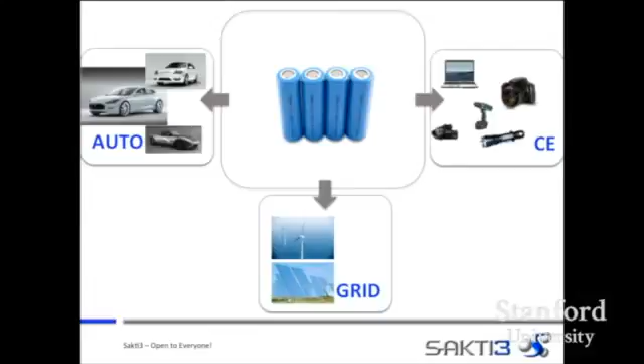And the reason is that batteries enable really important things. It's a simple statement, but it embodies a lot. Batteries are important in 3 different sectors, and interestingly, the same humble technology, the same 18650 cell. How many of you have seen a battery cell like this? It's 18 millimeters in diameter, 65 millimeters long, and it is in 3 different industries: consumer electronics, automotive, and grid storage. As such, it addresses billions of dollars in value. Most importantly, it affects our lives in ways both simple and profound.

In consumer electronics, the market sizes are enormous. Within a few years, we expect to see markets in excess of $4 billion, principally in smartphones and laptop computers today. I'll talk a little bit about what the next markets are going to be in a moment.

In automotive technologies, we project over $3 billion, and that really depends on when the launching point for electric vehicles will be. How many electric vehicle fans in the audience? I see charging stations. So I say not if, but when, and I know the people who raised their hands agree with me on that.

The reason is not just because generically we want to see clean technologies come onto the drivetrain, but from a life cycle analysis standpoint, an economic analysis standpoint, and a sustainability standpoint, we really think this is a very good solution to powering personal transportation.

An improbable thing happened in that gas prices went up enough to make it actually pencil to buy a hybrid electric vehicle. How many drive a hybrid? You're actually doing a good thing for your family finances by doing that. 10, 15 years ago, it was maybe a break-even proposition. Now that's not the case anymore. As we've seen market penetration of hybrid vehicles, we think there's a very strong economic case for electric vehicles if we can get the energy density up and the battery cost down.

In grids, most of the world has substandard electrification. Most of the important parts of the world, most of the economies that are going to come online and join the first world economies. It's interesting how we accomplished electrification in this country was with large public works projects, principally TVA and all that followed. In China, Three Gorges Dam was an example of that, very similar to how we accomplished our own electrification. What's likely to happen next are smart grids.

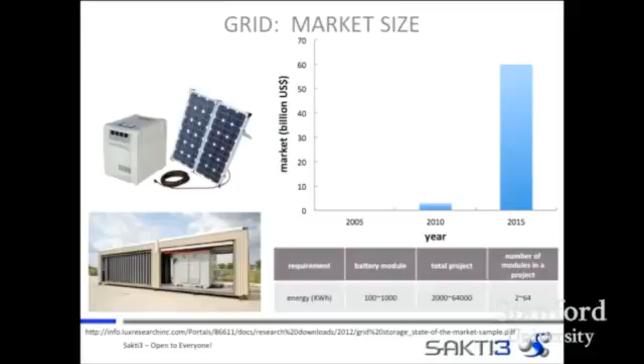So batteries don't actually enable everything we'd like to see just yet, and the principal reason is they cost too much. So certainly energy and power density are important, but the cost is presently a little too high to have everything that we'd like to see.

Over time, you're walking around your house or your office with a recharge cord hanging off your battery cell. The reason for that is complex. There are multiple reasons for failures inside batteries that limit their lifetime and performance, but it translates into something consumers can readily see.

By sector, there are different challenges. In consumer electronics, today's markets are obviously laptop computers and smartphones. Next are wearables, clearly. How many are wearing a wearable device right now? Those are the engineers, right? Wearables are likely to become a very important pathway to connection to the internet.

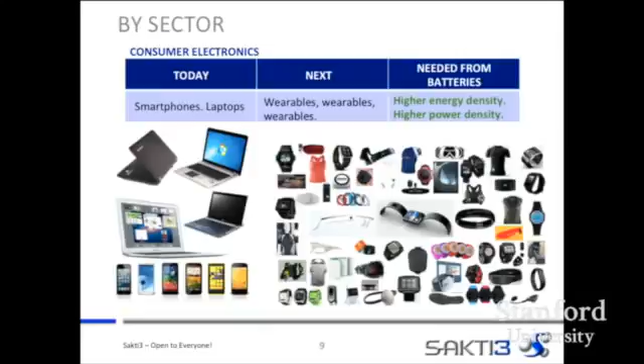Battery technology is not sufficient right now to enable the small devices that people really want. Wearables are a little bit larger, a little bit less energy dense, and a little bit expensive. So what's needed is higher energy density and higher power density. It's not the expense in this case, because the willingness to pay for a very high energy density technology—a wearable device you don't have to charge but every couple of days versus twice a day—is actually really high. People are willing to pay for that, especially given that the wearable device itself can be rather expensive. But energy density and power density are very important in that sector.

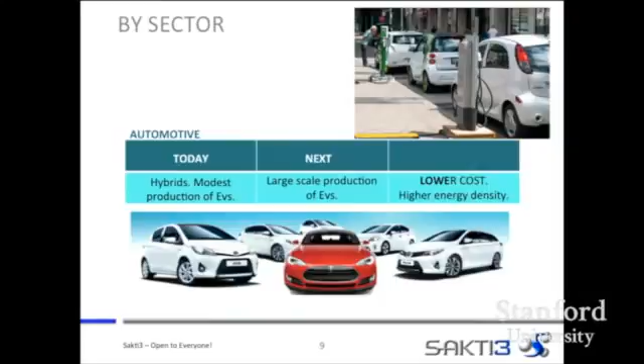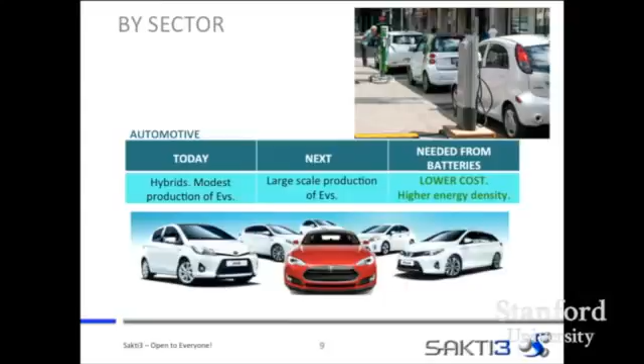In automotive, by contrast, today's markets are really hybrid vehicles and some production of EVs, but small run productions in general. The next markets, we believe, will be large-scale EVs—lower-cost EVs, so that everybody can have an electric vehicle. And what's needed there is not only high energy density for range—that's obvious, everybody would like more range, more electrons in their electronic gas tank—but most importantly is cost. A battery pack today can cost upwards of $15,000 to $30,000, comprising a huge cost to the vehicle and making it relatively unlikely that we'll see market penetration for economy vehicles.

In grid, today there are demonstration projects and microgrids in several municipalities around the United States and other countries, with some combinations—permutations of renewables, power electronics, electric machines, energy storage, and various generation technologies. So a genset plus electric storage plus renewables is a common scheme for that kind of system.

Tomorrow, the next markets are smarter grids that are larger, that can power homes, communities, and municipalities at a larger scale. Again, what's needed there is higher energy density and lower cost. When we look ahead, the grid battery cell is very similar to the auto battery cell—it's a larger capacity system, with more stringent operating requirements and more stringent safety requirements.

So by sector, if you summarize these things pretty simply and quickly, you come to the conclusion that if you have a higher energy density, a higher power density, and a lower cost, you not only enable new products, but you create larger markets. All right, so that's pretty well understood.

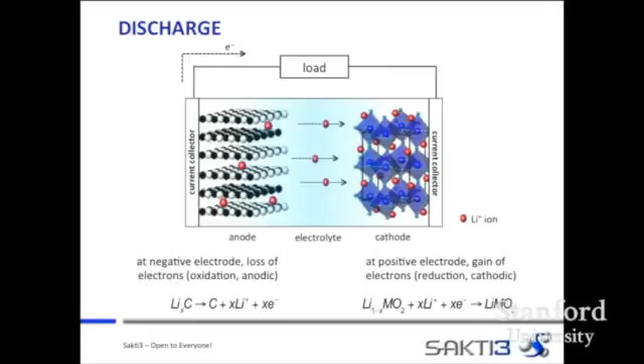For those who may not recall how a battery operates, here are a couple of slides to orient everyone. This is on discharge. At the negative electrode, there's a loss of electrons. The kinetic equations are written down. The anode and cathode are separated by a separator. In traditional batteries made by lamination technologies, a liquid electrolyte is used to allow transport of lithium ions from the anode to the cathode on discharge, and from the cathode to the anode on charge.

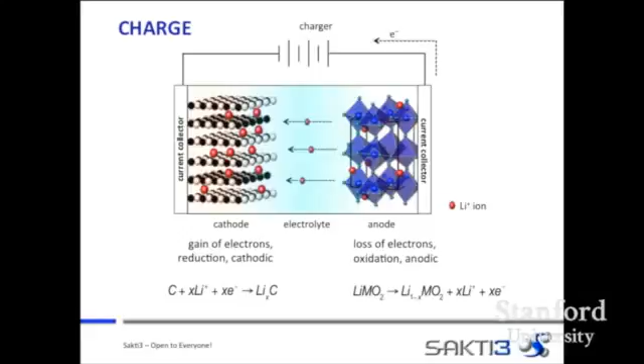Now, that's the toolkit, and that's pretty common globally. Those electrode materials, the cobalt oxide, nickel, cobalt, manganese, NCA, iron phosphate, vanadium, silicon, these electrochemistries, to a smaller extent silicon, titanates, are globally scaled already. And in general, they're all made the same way.

In a production process that uses porous materials, trained in a manufacturing line where the particles are mixed first in a wet slurry, deposited onto a conveyor belt, and rolled through a slot die or doctor blade to a certain thickness, rolled, compressed to shape. A separator is placed over the top, then the anode, which is generally carbon with lithium, and then that whole cell is vacuum filled with non-aqueous liquid electrolyte. In general, there are 18 or more unit operations in the production path.

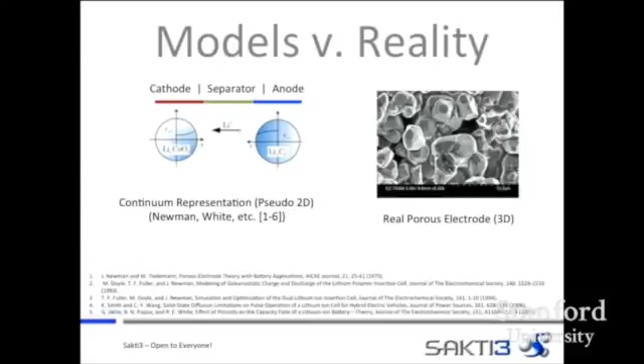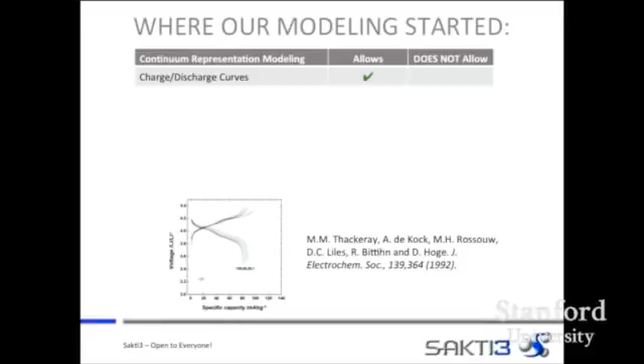The reality, of course, was a little different, as we've seen. A real porous material is very complex - it has multiple materials, even coated materials. The shapes of the materials are quite different; they're polydispersed, and not all particles even have the same shape, let alone the same size. When we started to work on this problem, it was clear that existing models allowed prediction of charge and discharge curves and allowed selection of high voltage electrochemistries or high theoretical capacity cathode chemistries that would give large total battery capacities. They didn't allow direct incorporation of the microstructure effect.

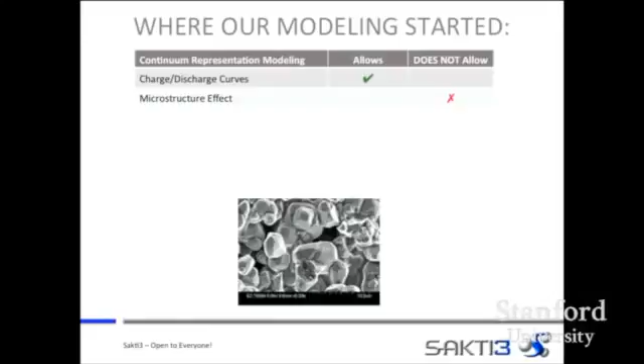Any porous media people in the audience? Bruggeman's correction, right? Handy for volume fraction, but it breaks down at very high and very low volume fractions. More importantly, it doesn't allow you to interrogate concentrations of stress, heat, electrons or charge, and chemical species. So even though you can account for changes in continuum behavior through corrections like Bruggeman's, it didn't allow us to interrogate how we select particles - should they be polydispersed for high packing fractions, or monodispersed? What should be the interparticle spacing? Some of these things you can control by selecting materials, and we really wanted to be able to do that.

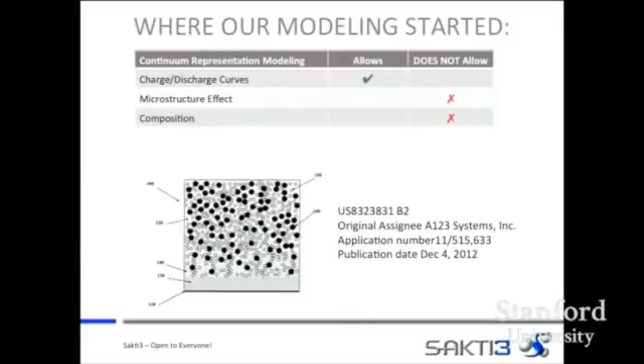A continuum model also doesn't allow direct interrogation of composition. When you assume one electrode or the other is a smooth, homogeneous continuum, it doesn't let you do the inverse problem - what should be the fractionation of species, how much PVDF, how much carbon can I tolerate, how much surface area to volume ratio? It also doesn't allow you to look directly at failure.

And so there are a lot of pictures like this in the battery literature. Who are our battery people here? I can say whatever I want now, right? Raise your hand higher - who are all the battery people?

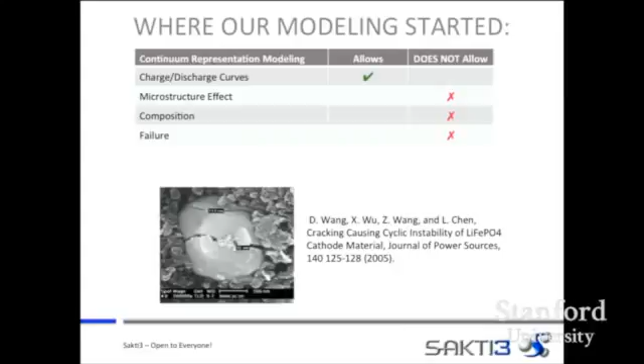Okay, admission, guilty admission. Yes, I know batteries have been the Afghanistan of the business world, but you see a lot of pictures like this, a lot of pictures of things that are putative failure mechanisms.

We had a question: where is this failure coming from? Because the manufacturing process actually incorporates large-scale deformations in these particle networks by compaction of the material under large rollers. So one of the questions we had was, are they breaking before or after you start charging the batteries? It looked pretty clear to us it was probably some combination of effects.

It didn't allow you to optimize microstructure. And this is something we were very interested in doing because there were a lot of possible solutions. So there's no point in modeling something and trying to wish it into existence.

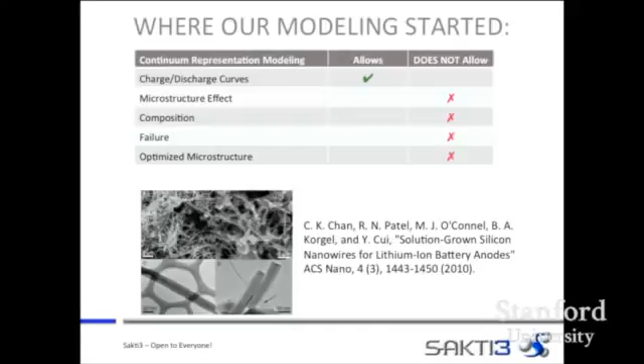There were a lot of groups proposing microstructures, everything from foams, like was done in nickel metal hydride batteries, which were the forerunner to lithium-ion batteries—that was the last generation electrochemistry—all the way up to HIPCO-produced nanowires and nanotubes and other kinds of microstructures.

So what we really wanted to be able to do was write down a set of models where we were solving partial differential equations on the surfaces of those particles, so we could decide what kind of particle microstructure to build. And then, of course, we wanted to be able to understand the manufacturing process effect.

To the earlier point, you induce some damage in manufacturing, and we wanted to be able to assess that, and certainly to be able to understand the difference between what we were doing to the materials in manufacturing versus what was happening to them due to intercalation stress.

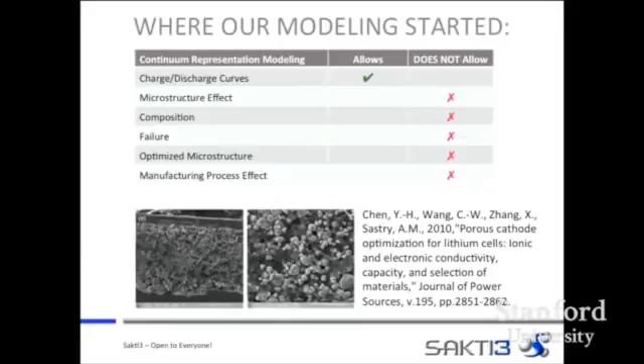Intercalation is when lithium nestles into the cathode and expands. Those can be coincident with very large volume changes, thus very large strains, thus phase changes in the material.

So if you put a large temperature change or a large stress change on the material, you've got a different material, you've got a different phase. And that in turn affects the intercalative properties of the material.

So it was important to us to understand where those stresses were coming from, whether they were intercalation induced, whether they were manufacturing induced, and also to understand the failure.

So we started to write some papers on mathematics, on percolation statistics, which is sort of a long-time love of mine, and critical phenomena—understanding the mathematics of the brink, the mathematics of the tipping point, the point at which you have at least one single domain spanning path of material that you can walk continuously from one boundary to another on. That really is the onset of the real change in transport properties.

So if I have a material that's non-conductive and I add some certain fraction of another material, at some point, at some volume fraction, I start to be able to conduct, right? That point is a percolation point, at which the conductive phase becomes connected.

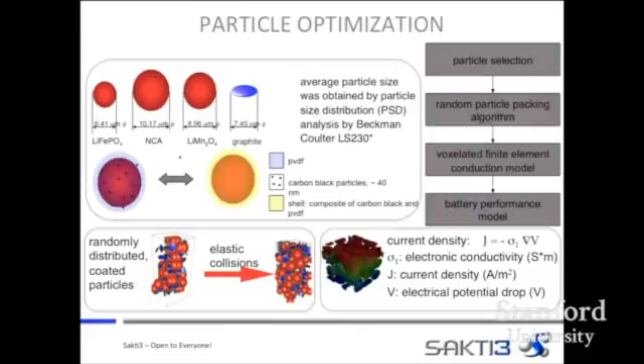So the whole reason people put carbon into battery cells in the cathode is to form those single domain spanning paths, in order to get conduction of the electrons. Because when you make a battery cell out of an oxide as the cathode, it's not very conductive. And for the battery cell to work, you need to be able to get electrons out.

So you need to add conductive additive to the point where, for a certain thickness of cathode, I can actually conduct and get the electrons out and drive a load—which is the first picture I showed on discharge.

So we were looking at all of these different materials, and there were some closed form solutions for certain kinds of arrays, monodispersed spheres and monodispersed rods and so forth. We wanted to look at everything at once, because the shapes and sizes of what was going into the battery cells were quite diverse.

So we first started to write papers about what happens in monodispersed systems where you have triaxial ellipsoids, very prolate systems, oblate systems—what are the critical phenomena? Then we started to look at polydispersed systems, and then we started to write algorithms, which are called settling algorithms.

So we could put spaces in 3-space, points in 3-space, assign particles to those spaces, apply gravity to the whole system, and then start off with something that you could do computation on. Because you can't do computation on something where the particles actually overlap. And so we came up with methods of writing algorithms to build the geometries that we do calculations on.

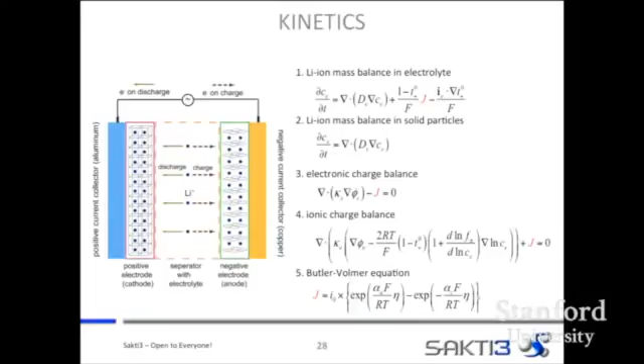Then we started to take a look at the kinetics. And the classic kinetic approach in battery cells is really the Butler-Volmer kinetics, which is a semi-empirical reduced analysis that enables you to write down the constitutive law, if you will, for a battery cell. And so we followed that same sort of pathway that had been laid out by Professors Newman and White and others, except that we wrote down the kinetic equations for the geometries of interest.

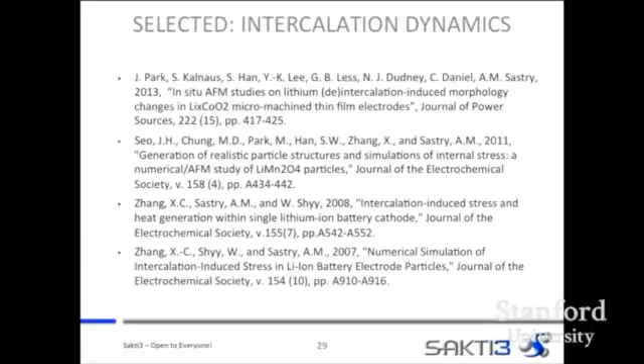And so we began to solve these PDEs on these multiply connected complex spaces. And we wrote several papers on intercalation dynamics for various electrochemistries, towards understanding what the relationship was with stress. And how we did that was we wrote down the mechanics equations, which I'll show in a second, with a dilatational term which represented intercalation dynamics. And so that was kind of a neat way of incorporating two pieces of the multiphysics into the same numerical framework.

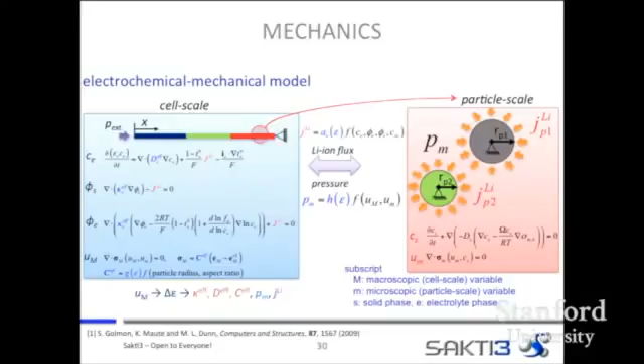Batteries swell, and what happens is during cycling of a battery cell, they irreversibly form lower density compounds, and they swell. Normally we ascribe those things to reactions of the electrolyte with the cathode, and that's pretty much what they are. But the bottom line is that swelling in a canister of a battery cell causes a pressure on the face. In a cylindrical cell, it causes multiaxial stress. In a prismatic cell, it causes a face pressure.

So we wanted to look at that too, because that ends up being really important in electric vehicles. It ends up being important because you have to figure out what the size of the casing is going to be for the battery cells. And so understanding what face pressure had to be in order to keep conductivity high was important. So we incorporated that into the analysis.

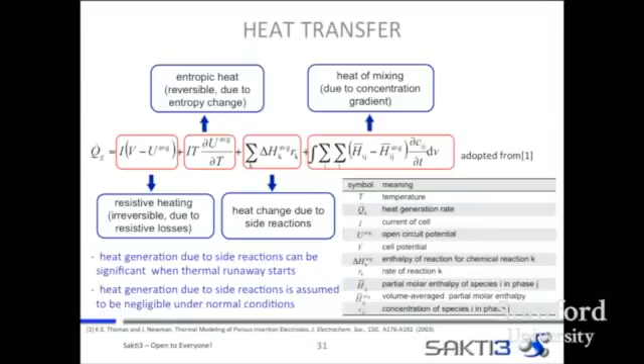We also worked out a representation for heat transfer, which allowed us to simultaneously look at resistive heating and entropic losses. And that was important because, again, for phase change, we wanted to know whether we were still cycling the same compound that we had started with. And so we developed a framework around that.

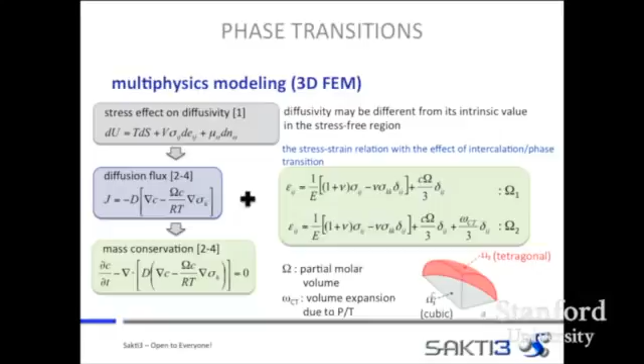And then finally, phase transitions in this part of the talk. So we looked at the stress effect on diffusivity, the flux, we applied mass conservation, and we were able to solve the PDEs on the surface of all these different particles for multiply complex regions. And we wrote a bunch of papers about that.

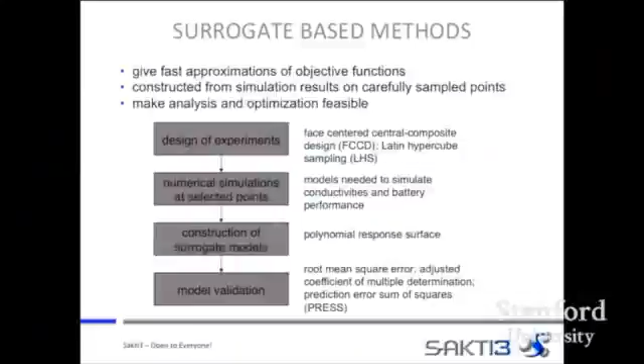Finally, in optimization, we use surrogate-based methods. That's just a robust way of arriving at minimum energy solutions when you write out, generally speaking, a set of partial differential equations which describe physical phenomena, and you're looking for local minima. Then you're trying to either minimize cost or maximize energy density or maximize power density or apply some weighting function to certain objectives. So what we wanted to do was systematically compare battery performance based on changing what went into the batteries. It was important for us to develop that framework.

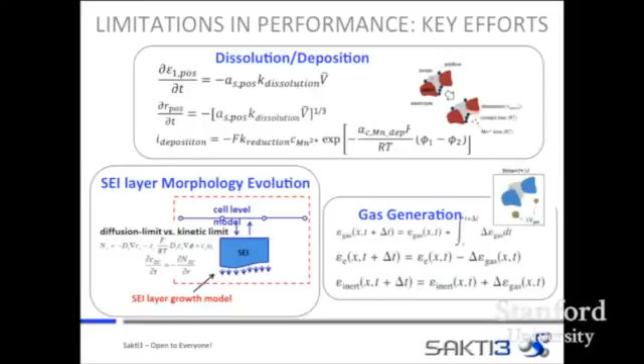And of course, we wrote a number of papers about that as well, including degradation mechanisms. So to summarize the key efforts we looked at over around 20 years or so of work on the subject: dissolution and deposition, looking at dissolving the cathode and its effect on battery cell performance, SEI layer morphology evolution, and gas generation being the principal root causes that we thought of as important in degrading battery cells.

Then we thought, this is great, okay? So now we've got a framework, and we can systematically look at the trade-offs between some important parameters, and I'll show you a couple of those. One is ionic versus electronic conductivity.

For ionic conductivity, you want the lithium in the cathode, or lithium in the anode, to race to the cathode, and then you want it to race right back. You want to recover 100% of it. You want as reversible a reaction as you can, and therefore you want the ionic conductivity to be very high. Liquid electrolytes make sense on that basis because they tend to have a really high ionic conductivity, in general higher than what is solid.

On the other hand, you also want the electronic conductivity to be high, and so you want the electronic conductivity in the cathode to be high. That suggests you use a high degree of conductive additive, and maybe you have a lower porosity, which gives you less room for your multiply connected electrolyte. So these two things tend to be at odds in a real battery cell.

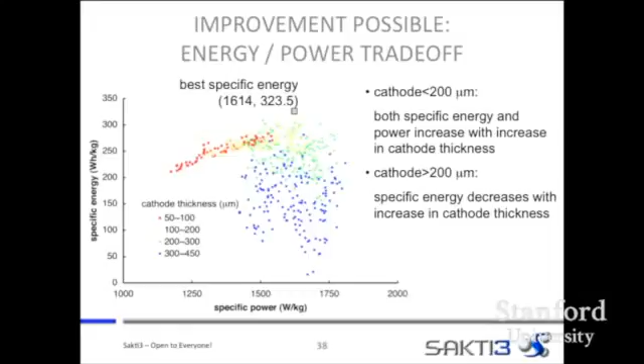We also looked at energy and power. So for a high power system, students in the room, what do you think you'd want? A very thin electrode or a very thick electrode? Why? There's resistance in going through the electrode. Precisely. You don't want to deal with all that resistance, right? You want to get the electrons and the ions out fast. And so thin makes a lot of sense. It's all surface area, right? Everything's sitting right there on the surface, very accessible, right?

For energy, you want the reverse. You want a really high capacity, and you want to reduce parasitic masses. So you don't want to pay for things like a large amount of electrolyte or a huge separator in your system. You don't want to pay for any parasitic masses. You want a nice, big, thick electrode. Again, you're at odds, right? And so looking at the trade-off between energy and power was very important. Typically in commercial cells, you'll see cells advertised as either high power or high energy, but generally not both.

For that very reason, because the thicker electrodes tend to be the energy cells, the thinner ones tend to be the power cells. We looked at specific energy against specific power, and again, for cathode thicknesses, identified where you would find commercial sweet spots, where you would find combinations of specific power, specific energy, and cathode thicknesses. It sort of made sense.

And then finally, one other example, improvement possible in reducing mechanical failure. So presuming that mechanical failure was, by classical fracture analysis, an initiation phenomena where you would have a small penny-shaped crack of infinitesimal size that at a certain strain becomes a growing crack, right? So it's classic fracture analysis. The idea was to figure out how small of a particle you can have such that your strain never gets big enough to grow a crack. It's not that you'll never have cracks, it's just that it won't reach the critical size.

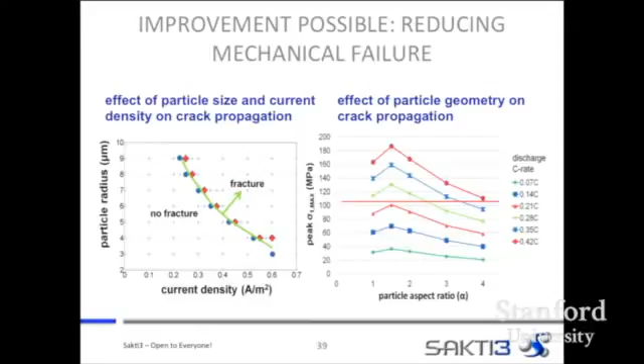And so we identified some ranges, and it turned out that there was a small enough particle where you were unlikely to get propagation of failure.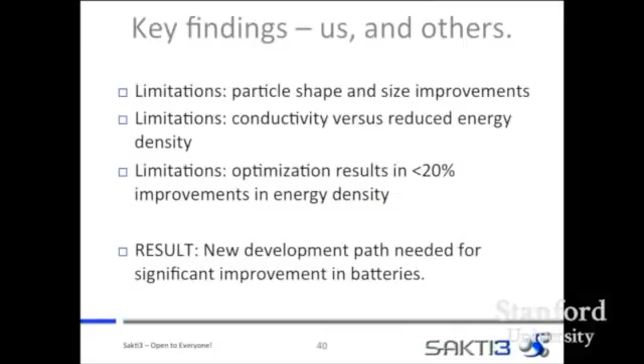We had begun this journey hoping to really look at how much things could be improved, with the thinking being: with the 5-volt materials coming online, with very high energy density cathode particles, can we reduce some of the conductive additives and really see a generational change? We really weren't seeing that. So the result was that we felt we needed a new development path for significant improvement in battery cells. Now into what we think of as the interesting part: the best way to build a battery if you could do it at low cost.

So you have a number of choices: 1D, 2D, and 3D. Generically, we can think of a 1D material like a plate, and you could distribute the active material like a 1D object. 2D would be like a rod, and 3D would be sort of a sphere. In the limit where you have all of the active material in 1D, it's really a thin film, because that's a 1D phenomenon—you're moving right in the Z direction in the film. So you can think of 1D, 2D, and 3D in that way.

You can do a thought experiment with geometries defined then. The thought experiment is like this: suppose I distribute the active material as a sphere, a rod, or a plate—a thin film, 1D, Z direction only. Can I calculate the diffusive properties and the packing fractions that tell me which is the fastest horse to ride? What's the path to really deliver on? Because as you saw in this picture...

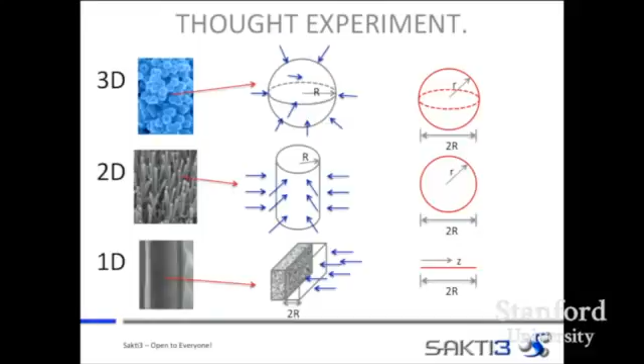And so with all these choices, we wanted a framework. This is actually a paper that we're just finalizing now, with Dr. Park, Professor Liu, and I. So here are the diffusion equations and boundary conditions, and they're pretty standard. You have a flux at the outside of the object and nothing at the inside—no flux at the inside. You look at diffusion as it moves through the object, as a sphere, as a rod, or in a plate in the Z direction.

You can quite readily and directly calculate the volumetric capacity. Assuming some diffusion coefficient, you can quite readily calculate what happens to a sphere in a box, a cylinder in a box, and a cube filled with space-filling material. And then you can quite readily calculate what the diffusion-limited capacity is.

Now, it's a little bit obvious that for really small particles, in the limit as your particle dimension goes to epsilon, or epsilon goes to 0 even, they all look the same—doesn't matter if they're rods or spheres or thin films, it's all the same. As the particles get bigger, as the thin films get thicker, the differences start to emerge. The other thing to look at is that as the C rate, the rate of charge and discharge, increases, there are also differences. The thin films don't look as good, because you can't get across them—they're too thick.

If you increase the diffusivity in this example, in this little thought experiment, by 10x, the differences start to disappear. So if you develop on the path where you have improved diffusivity, all of a sudden the differences between these nanoarchitectured materials and the thin films are not as significant.

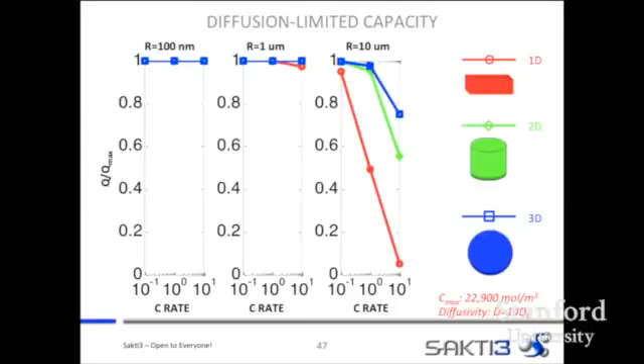But there's a wrinkle. It's not just diffusivity that matters, it's also packing fraction, because you can't have a space-filling system of rods, and you can't have a space-filling system of monodispersed spheres—you're limited in how many you can pack in. So when you factor that in, the analysis reverses, the result reverses. Actually, the highest capacity system is the thin film for the low and mid-range thickness, and the sphere is actually the worst in those two cases. If you then develop along the line of making a more diffusive system, your thin film almost always wins.

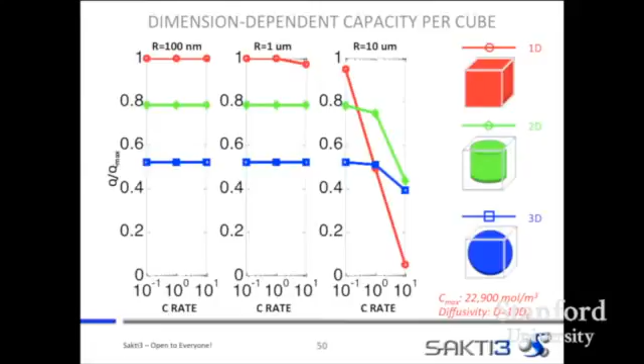So when we asked the scientific question of what path should you develop on, we said solid state, and work on the diffusivity. The other thing to note about this calculation is that these numbers are for lithium manganese oxide, which is a very typical cathode material used globally today.

The C rates are: C over 10 is normal for consumer electronics, C rate is very fast for consumer electronics and sort of normal for cars, and 10C is about the highest you'd ever really ask a battery to do. Most of that high C rate can be accomplished with S-P configurations rather than simply discharging a single battery cell at a very high rate.

So this is really a very practical set of projections, and this is why we are working on solid-state batteries.

Thin film today really had its genesis at Oak Ridge National Labs with John Bates and Nancy Dudney, who's been a collaborator of ours. At Oak Ridge, starting in about 1991, there were a number of different cathode electrochemistries explored.

There are a few companies doing this now. Most are making very small batteries, and most of the incumbents are also working on the cobalt oxide system. It's challenging to do this cheaply.

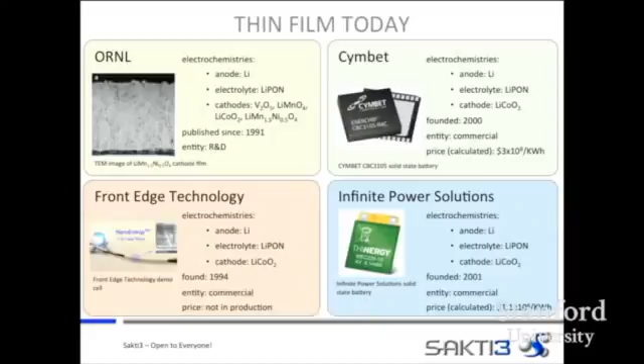So the other thing we decided to work on when we started a company was doing it on a low-cost manufacturing platform. Interestingly, when we calculate and project the price, it's millions and millions of dollars per kilowatt hour. So here was the riddle.

The cost, though, is a big deal, because the cost of the cell alone for a high-end system is $500 per kilowatt hour. When you put all of the system costs over that, it's actually quite expensive.

The R&D solid-state demonstration projects were producing battery cells with very high energy density and very high cycle life, but very expensive. So what we wanted to do was use modeling to optimize cells and pick a low-cost manufacturing route. To have real impact, we need to make them cheaply.

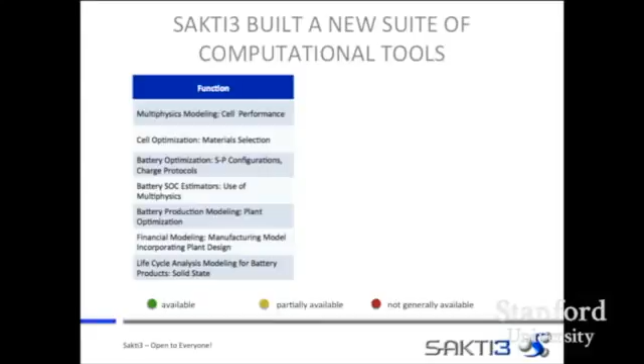So Sakti3 built a new suite of computational tools, which span multi-physics, cell optimization, battery optimization, state of charge estimators, production modeling, financial modeling, and finally life cycle analysis, which is the last thing I'll talk about.

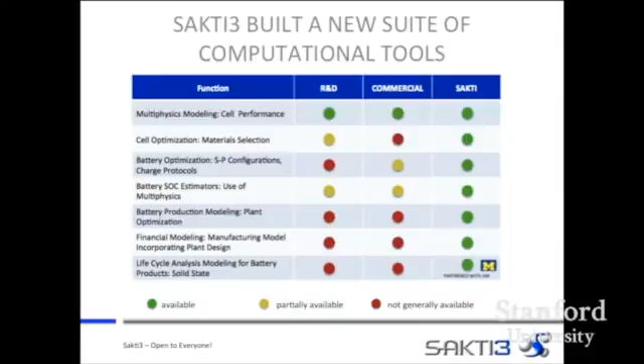R&D codes had some elements of all of these, and commercial codes had some elements of all of these. What we did was put them together so the handoff at each step—harder than it sometimes sounds—ensures everybody's using the same notation, handing off the same variables, and doing enough tests every time you make a change in one piece of code so an error doesn't propagate. It's actually very challenging to incorporate all these areas of science and mathematics, but that's what we set out to do, because we knew when we got to that bottom box, we wanted these products to make sense.

So we built design codes: cell performance, cell optimization, state of charge estimation, battery optimization, plant optimization, battery cost forecasting, and life cycle analysis. And these are what we projected.

We looked at about a dozen different electrochemistries before settling on the first one we decided to work on, and we projected pretty big improvements in energy density, which was our number one thing to work on.

We also did a lot of optimization of component thicknesses before we ever started manufacturing anything. Before we ever started prototyping, we ran the codes to figure out how thick and thin things needed to be, how fast we needed to produce them, et cetera.

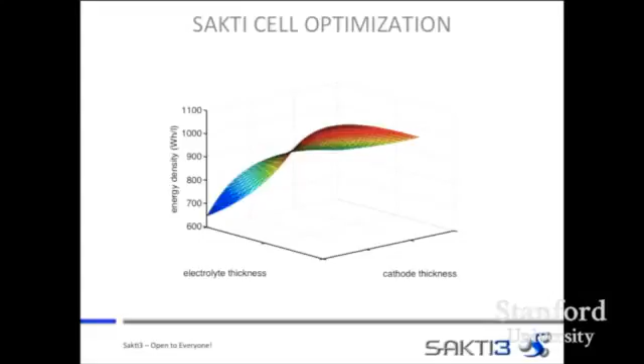And then we started building prototypes, and we continued to build the codes as we built the prototypes, building them cheaply using the computational results. So rather than drop down a rabbit hole, which was the concern that we'll drop into a system that can't make it at scale, we wanted to make sure and only execute prototypes that actually could be scaled. So this is the generic process methodology.

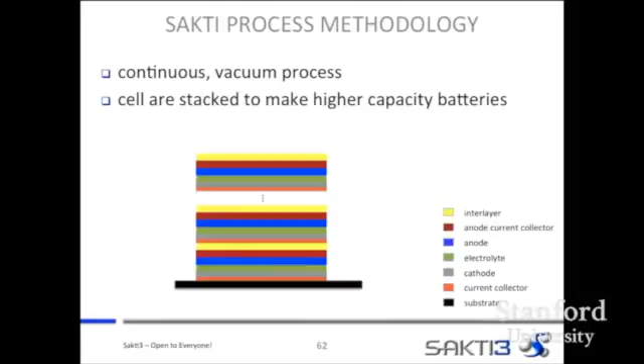Substrate, current collector, cathode, electrolyte, anode, anode current collector, and an interlayer, and then repeat. And the cells are stacked to make stacked battery cells. Using this kind of a process, you can actually dismantle some of the cost structure.

The device methodology is like this: thin electrodes in the micron range rather than thick electrodes in the hundreds of micron range, pursuant to the discussion earlier that you want to have high enough diffusivity and conductivity to make for a high enough energy and a high enough power cell, and no additives being required. That's sort of a boundary condition, because if you start doing things like putting platinum into your battery cells, you're not going to make them cheaply enough so that everybody can have an electric vehicle.

What does that mean? Wasted a bunch of material, right? You might as well have just saved yourself half the material cost of the cathode. That was stupid. You never even got to the other side. So you want to design it perfectly so that you've utilized the cathode completely, right?

A thick cathode at low rate, all red, okay? That's fully utilized. And so thick, thin, high rate, low rate, we ran lots of recursive calculations to optimize the battery cell's dimensions to accommodate the load profiles that we thought were important. And we also developed some other unique capabilities.

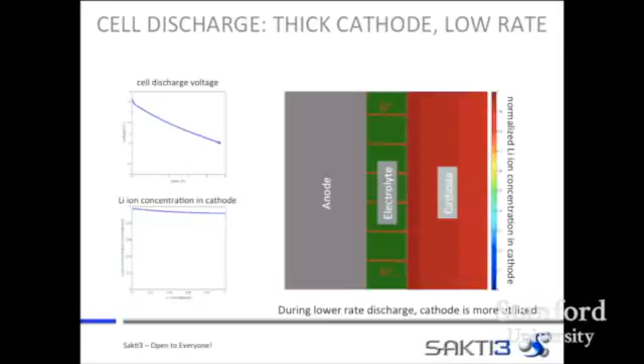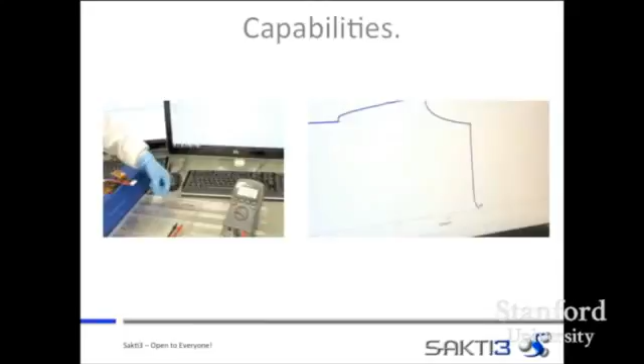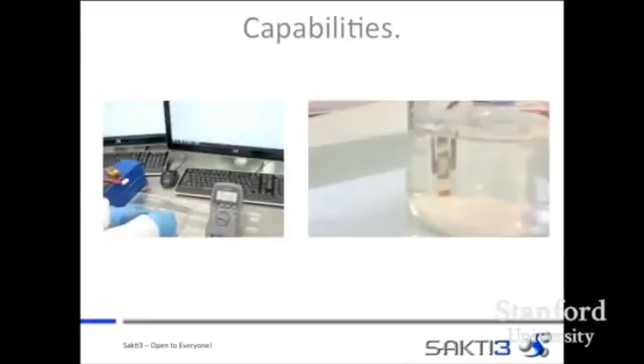On the left is one of our battery cells on test. The engineer breaks it in half, and she breaks it in two, places one part on the table. The part that's still on test keeps cycling. It's kind of handy, right? And then she's going to put the probes on the part that's broken on the table, and it still has a voltage. So I would not recommend doing that with a battery cell on your smartphone, because the liquid electrolyte will all come out of it, and it's not very safe.

And the movie on the right, a battery cell, one of the Sakti3 battery cells packaged with our inline process, is dunked into a jar of water. Briefly, the voltage drops because the leads short to each other because the water is minimally conductive. Battery cells pulled out, and the voltage comes back. So again, capabilities, things that you can do in solid-state battery cells that are difficult, if not impossible, to figure out how to do with the incumbent technology.

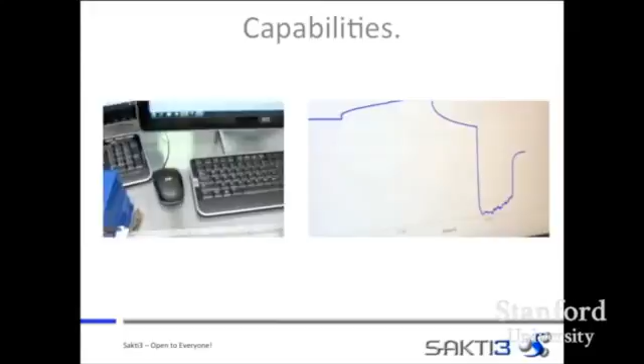In addition, these cells have very, very high energy density. So this is one of our champion cells showing over 1,000 watt-hour per liter, which is approximately double what's in the marketplace now. So you get very, very high energy density, good safety, and some unique properties.

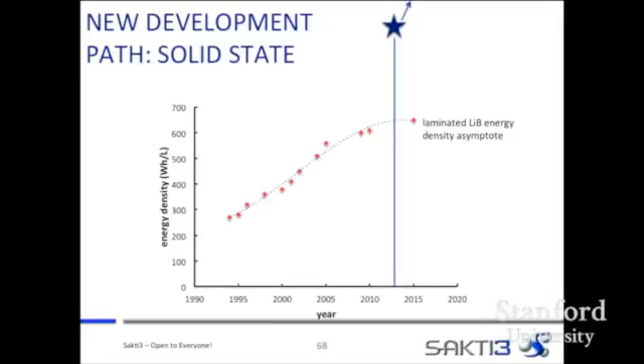So we think that that's an appropriate new development path. These are data from Panasonic showing that battery cell energy densities have approximately asymptoted, right, over a couple and a half decades worth of development work. And that fits with what we understood to be happening based on our simulations. Solid state is a completely different development path. So if you had a great material, make it into a solid state battery.

People complain a lot about batteries, that there haven't been new breakthroughs in 20 or 30 years. But if you track what happened in new electrochemistries, it actually hasn't been all that long. Since the invention of lithium cobalt oxide, it took 31 years until it was scaled globally, and it's an expensive technology. Iron phosphate took 16 years or so, and NCA and NMC took 12 years. So from invention of higher energy density materials to scaling globally actually happened pretty fast, partly because there was an established supply chain.

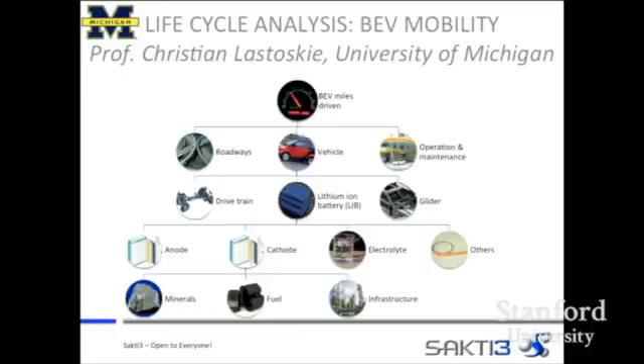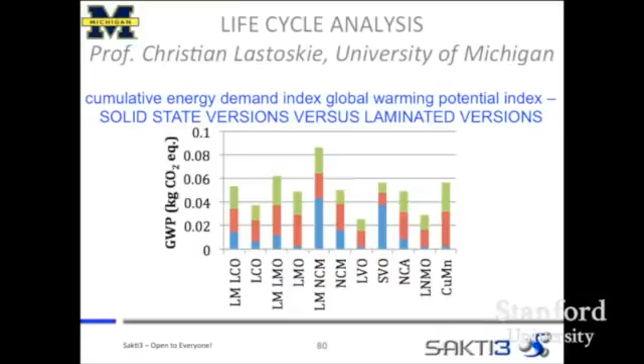So if everything were to flip to battery cells, specifically solid-state battery cells, what would happen? Professor Lastoskie's group collaborated with us—we gave data, they did the analysis—on cumulative energy demand index and global warming potential for solid-state versus laminated versions for a few electrochemistries. It showed that not only are laminated battery cells from a life cycle analysis favorable over an IC engine-driven drivetrain, but the solid-state versions are even better. That's gratifying, partly because solid-state versions are so much more energy dense—not only because materials can be entrained and recycled more readily, but because you're kicking out more watt hour per liter from a plant.

So to conclude, it's a lot of batteries. We think solid state has a very good development path going forward. I hope everybody in the room working on your own technologies will start to think in advance about these issues prior to inventing a new technology.

When I was a young engineer at DuPont, the plastic bottles had a large unintended consequence, and the inventor of those plastic bottles spent the last 10, 15 years figuring out how to recycle them. It would be great if everybody in the room thought about these things up front—thought about the life cycle analysis up front.

The reason, in the case of batteries, is that it's a huge set of markets—just enormous. 6,800 million mobile cellular subscriptions, 90 terawatt hours per year. In vehicles, 7,600 terawatt hours per year just in energy use in the United States, dwarfed by the global figure of 29,000 terawatt hours per year in energy use. So the way these materials are recovered and recycled, and the importance of establishing a profitable means to recover those materials, cannot be overstated.